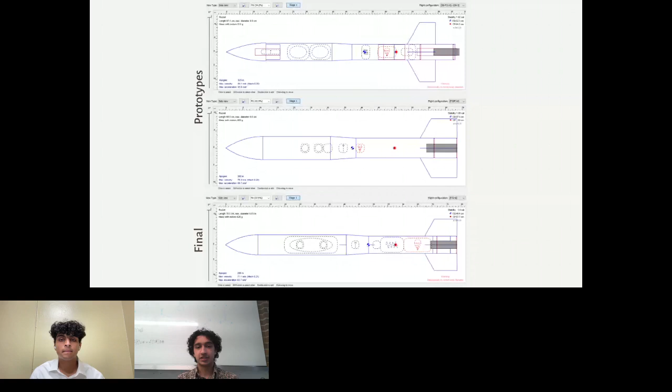So some of the factors that we consider are mass distribution, which is a huge one. For example, that means where we place the ballast and also where we place the altimeter. You can see in the top model, the altimeter is inside the nose cone, and in the bottom two, the altimeter is inside the transition. And again, those impact the center of gravity, where it is in the rocket, pretty strongly. Another factor we like to change is the length of the rocket.

And that's important because the length of the rocket gives us a lot of control over where we can put the CG and CP. And of course, that leads us to stability, which we can change the CP with mostly the fins. So how big they are and how far up on the rocket body they are. The bigger the fins, the farther back the CP is, and therefore the higher our stability margin will be as well.

And we always aim for a stability margin of between 1 and 2, where stability is the distance between the center of gravity and the center of pressure divided by the diameter of your rocket. And 1.2 or 1 to 2 is generally a good range so that your fins can correct for the wind without weathercocking and overcorrecting.

Yeah, so we come up with these different designs. We simulate them with different motors depending on the mass of the different prototypes. You can see in the top one, it's 520-ish grams. The second one is about like 480, I think. So you definitely need different motors there to reach around the right altitude you want. And in the final one, we basically set up all the best parts of every prototype, and then we start building.

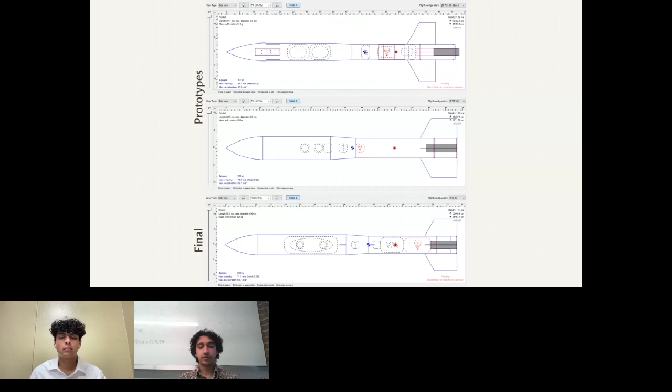So in the building process, 3D printing is one of our most vital technologies. It really, honestly, is probably the biggest contributor to our success in the technical department. First of all, it's extremely versatile, and you can rapidly prototype pretty much any component you want. For example, on the right here is our altimeter sled.

You can see it started out as just a simple pin-based mechanism where you just slot it into a body tube and put a pin through it, and it's supposed to stay there. But it gradually evolved to institute a thread and screw system where threads are epoxied onto that body tube, and that just makes it much more easily replaceable and a lot better. So 3D printing often happens alongside a CAD program, and my program of choice was Fusion 360.

But 3D printing is not without its limitations, one of the biggest of which is anisotropy. So when a material is anisotropic, that means its material properties in one direction are different than another direction. And in the case of 3D printed parts, because they're built up layer by layer, they are weaker along the layer lines than perpendicular to them.

So what that means for how you design or tweak models for 3D printing, for example, our fins, which I'll show you a picture on the next slide, we print them on their leading edge. And that is basically to mitigate any of the impacts they receive on landing to be in their strong direction rather than their weak direction. And that was a problem we had faced in previous seasons, where if you print them triangular or trapezoidal base down, they actually are prone to snapping on landing, which obviously we don't want.

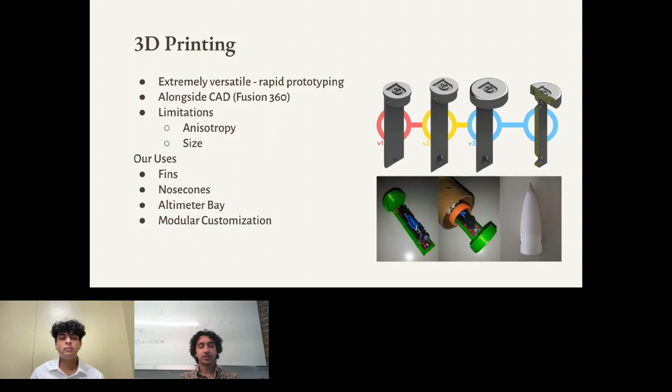Another limitation of 3D printing is size, because you can only 3D print something as big as your printer is. But generally, for our needs, that is not really a big problem for us. So we use 3D printing for a whole lot. We print fins, nose cones, altimeter bay, and basically any part that lets us customize our rocket and make it more modular.

So on the left is basically the 3D printed parts of our 2022 rocket. Those are the fins and the nose cone. So you can see we have to do a decent amount of post-processing on these parts to get them to a flight-ready state. And that mostly includes a lot of sanding, which Shreyas bore the brunt of, I'm afraid. But we have to sand all those layer lines away to make it smooth enough for the airframe.

And that includes the nose cone as well. And then we paint the nose cone. And yeah, that's the process for post-processing. We also round the front corners of those fins, and they have tangs to increase their strength. And on the right, those we did not use in 2022, but those were developments I made later on. And I want to share them because, just for your reference, I think they definitely help a lot more than some of the systems we had in 2022.

So the top left there, that is a modular fin can system. So basically, you epoxy a set of threads into body tubes, and that lets you have super modular control over every parameter of your flight body. So your fin cans, you can make them tapered like you see in that picture. You can have any different kinds of fins you want, bigger, smaller, farther forward, different shapes even. And you can just swap those in and out by unscrewing and screwing in a new section.

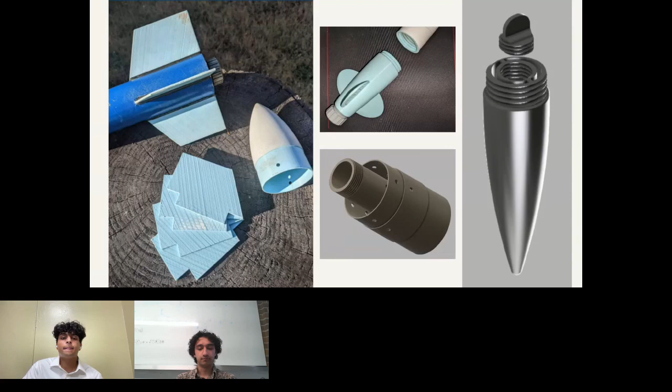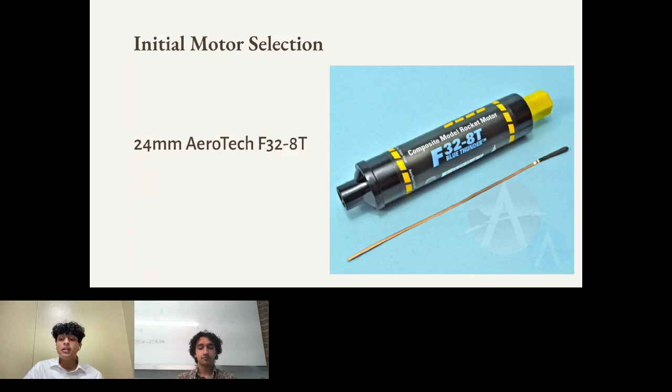Now we'll get into some of the launch. So after actually manufacturing our prototypes and stuff, we went and collected launch data, analyzed launch footage, and made engineering decisions based off of those results. So initially, for the motor, we looked at our inventory of what the club had, and also referenced OpenRocket to see what motor would be ideal for the goals we were trying to achieve. And we ultimately determined that an Aerotech F32 motor would probably be the most ideal. So that is what we initially selected and launched with.

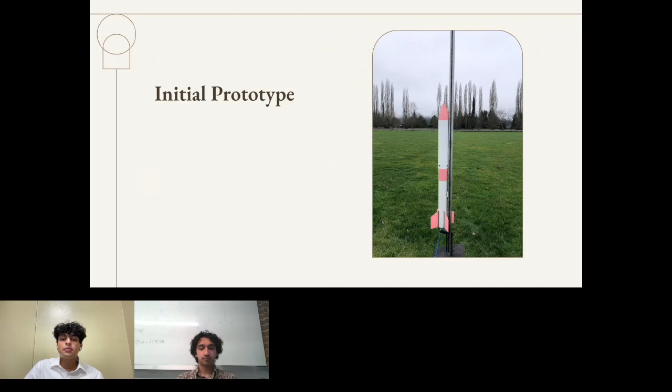So here you can see, this was the first time one of our rockets was on a rail during the 2022 season. And one thing you can notice here is that neither section is painted, which is a requirement for your qualification launches for TARC. But in this case, for initial prototype, just to see the flight behavior, it wasn't important. So I'm going to show a few launches just for you guys to get an understanding of what we were working with, and then we'll talk about some of the decisions we made from there. One, go!

Okay, so as you can see, it had a pretty straight trajectory, which we were very pleased to see on our first launch. But as we continued testing, hold on. I'm not sure why that one isn't working, but we have enough clips. So one thing we noticed is we were experiencing some tilt, usually 10 to 15 degrees off the launch rail. So yeah, you can see that in this clip. 5, 4, 3, 2, 1. Again, similar flight behavior.

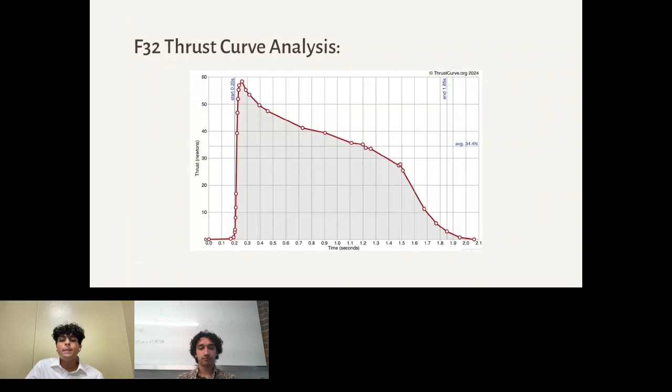So looking at the F32 thrust curve analysis, you can see that the burnout for an F32 motor is about 2.1 seconds. And like I mentioned, we wanted a motor which provided the same amount of impulse, but with a faster burn time, so we would have a faster exit velocity. Hopefully, that would fix the stability issue that we had. So again, assessing our possible motors from the club inventory, and also looking at OpenRocket, we ultimately decided that we wanted to try launching with a Cesaroni F70 motor.

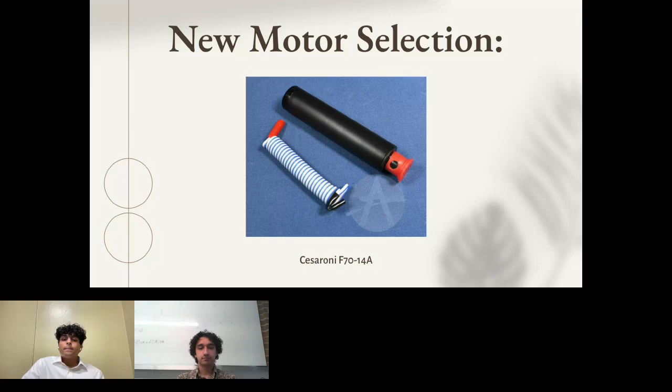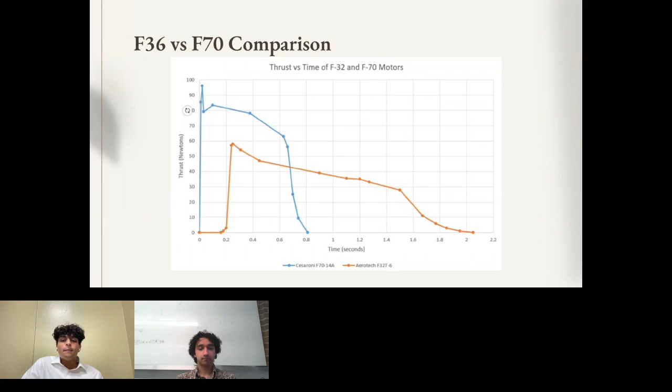And here you can see with the F70, the burnout time is about 0.8 seconds, which is much faster, and it provides roughly the same amount of impulse. So here's the side-by-side comparison. You can see the thrust curves. And here's some launch footage with our new motor. 2, 1.

So as you can see, pretty straight trajectory. And one thing that we were able to achieve was actual consistency with the straight line trajectory. 4, 3, 2, 1. So straight into the clouds in that one. 4, and then 3, 2, 1. Yeah, so we were overall really happy with our results.

And the other thing that Cesaroni was better about is, given that these are hobby grade motors, we noticed that the Aerotech batch we had, I think it was from 2019, was pretty inconsistent. That's why some of the initial launches were straight, but then we had some tilted launches and some straight launches in the mix. And we noticed that Cesaroni's quality control happened to be better. So it fixed our problem, and the motors were more consistent, so we were able to depend on them and rely on them more.

Yeah, and in the chat, that's definitely true. Fighting the weather is probably the biggest problem you encounter in this kind of competition.

In terms of how we actually control our altitude, we do it through a mass adjustment system. I alluded to that earlier when I was talking about the ball bearings in our later development, but at this time we were using washers and coins, basically anything circular, so that our center of gravity would stay within that central axis of our airframe, using different components like wood, metal, rubber sometimes for different densities, and that lets us have some pretty decent control over our mass.

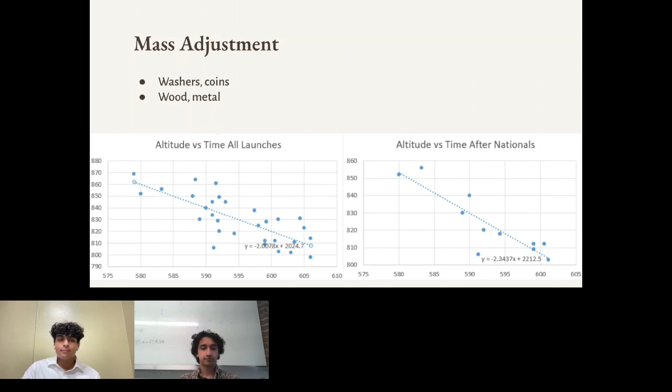And before you start thinking we're all technical, this definitely would not have been possible without our entire team, without the snacks we brought to launches, and without the 30-foot pole we had to use to get our rocket out of trees at times. So the rocket, with that tilt, obviously did not go straight up and down. Sometimes it went over the river, sometimes it went into trees. And it was really thanks to our team and all of their hard work that we were able to recover it so many times and be successful in the end.

So ultimately, we ended up qualifying for nationals. The process for qualifying for nationals is you find a NAR adjudicator, and they come to your launch site. In this case, our mentor was actually a NAR member who was eligible for this, so Bruce Buswell was our adjudicator. Basically, you have 3 launches. You declare it's a qualification flight before you launch, and you launch it, and then your two best launches are submitted. I think it's by the first week of April, roughly.

And you're basically stacked up against around 700, 800 other teams. The lowest scoring 100 teams make the national finals. So normally, under 50 points for your two launches together, you'll most likely make nationals. I forget exactly what our score was. We tried finding it, but we didn't have any documentation on that. But now we'll get into nationals and the summary of our launches there.

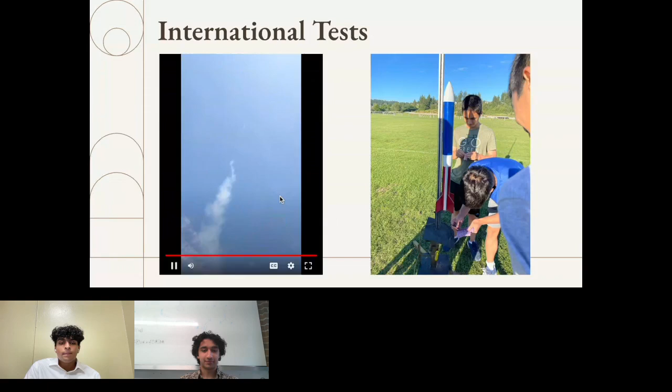How do you want to? Yeah, here's just an example of one of our international flight launches. Here we go. Yeah, that one's a pretty nice flight. Yeah, 60 acres, soccer games, all the time. We definitely had to reschedule a few launches because of that.

Getting motors to England. Yeah, so we shipped those to our hotel, I think, right? Yeah, we used Aurora Flight Sciences, I think. I think NAR has some ties to them. So John Hochheimer, the president, coordinated with Aurora Flight Sciences to support the shipment of our motors to England. Yeah. At the IRC, there's only 4 teams, right? So they're able to really give you a lot of support in making sure you have all your tools, basically. Yeah.

Yeah, and then beyond the actual launching, me and Vanu couldn't find any launch footage of the actual launch we did at the competition, unfortunately. But overall, it was a really cool experience.

We had the opportunity to meet Matthias Maurer, who is an astronaut for the ESA, and also, given that Farnborough International Air Show is a trade show, we had some time to walk around and see what is at the forefront of the aerospace industry right now. And that was a really cool experience because we're all very interested in aviation and space too. All the big companies were there and they had booths and actual tech displays out, which was really cool.

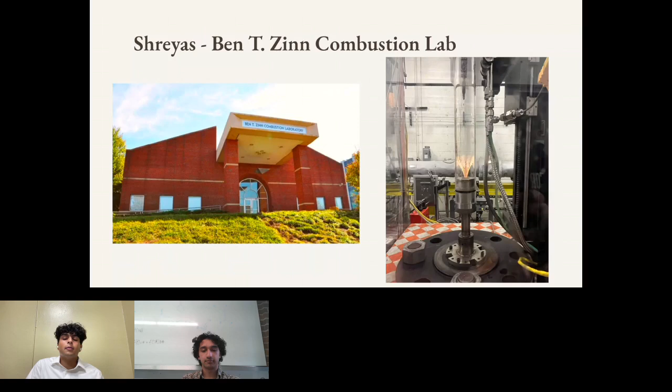Yeah. Thank you so much for having us and taking the time to listen to us. We also wanted to extend our gratitude to Bruce Buswell, our mentor throughout high school. He has been an amazing mentor, and he knows a lot and is really supportive. He's always ready to help. And in general, just thanks to the American Rocketry Challenge for providing us with relevant STEM experience in high school. I'd say that STEM curiosity that we've all experienced was definitely intensified by competing in this competition and has definitely set us up for success in college.

Vinu, do you have anything? Yeah, and probably not a lot of you are middle and high school students, but even if you're not, you can still get involved with the American Rocketry Challenge by mentoring a team or volunteering with the competition. And I think both of those are really great ways to get more involved with this community. And yeah, it's just a great opportunity.